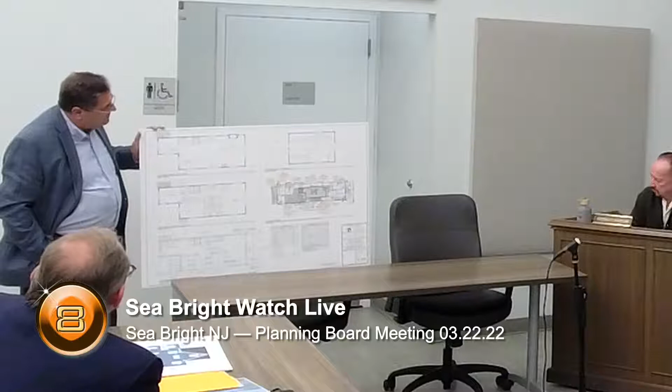We are proposing an elevator so that guests and groceries can get up to the kitchen a little bit easier. There is an attic as well that leads out to a balcony in the front, taking advantage of the ocean view along Ocean Avenue, and a half balcony off the rear, which could look at the river and mountain view. So we're trying to take advantage of all the views with this concept.

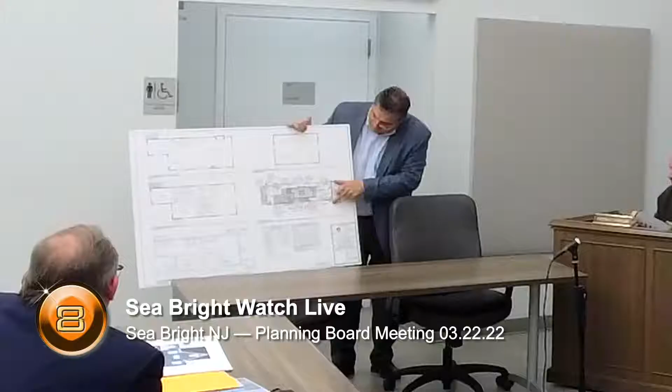Any questions? So I just showed the board the survey, sort of a site plan, giving the board orientation—I'm sure they're familiar with it, but we've got that 40-foot width on Ocean. So the property's only 40 feet wide, but it is 140 feet deep. So where it doesn't meet the requirements for the width of the property in this zone, it's bigger than what's required square footage wise.

So this is 5,600 square feet, and I believe only 4,000 is required for this zone. So we meet the square footage, we just don't meet the width. It's supposed to be a 50-foot width according to the zone, but this is pre-existing, and if we keep the setbacks on a 40-foot wide lot, we're basically left with a trailer. I mean, you basically have 10 feet left to build a home.

So we hold the 25 feet off of Ocean Avenue, which is required. 25-foot 9 off of Ocean Avenue. Originally it was 40 feet, so we're bringing it a little bit forward. And we're maintaining 8 feet on Mountain View Way and 7 feet on the rear side of the property.

So the 8 feet proposed along Mountain View Way complies with the side setback in the zone, but technically requires a variance, right? Because we technically have 2 front yards since it's a corner lot. That's correct, which would require a 25-foot setback off of Mountain View as well, which would leave us with really a sliver, like a little train car kind of thing.

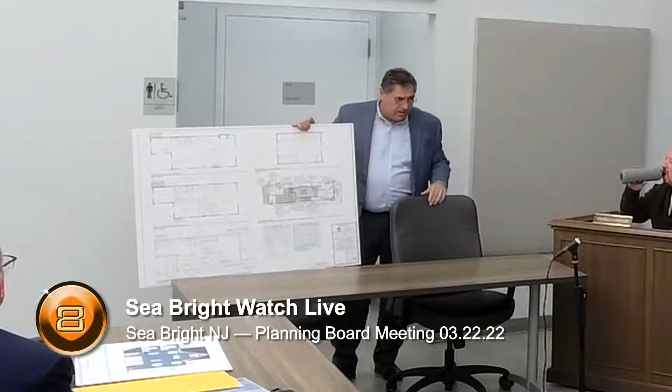Okay, so we've got the lot width, we've got the setback issue, and then the last variance we need pertains to... oh wait, before we go to that, on your top level there, what did you have? This up here? Yeah, so this is the attic space above the living area, continuing up, and basically it's a semi-finished attic that leads to a front balcony and a rear balcony to capture these views. So that qualifies as a half-story then? Yes, it meets the 1/3 rule of the floor level.

And then, okay Sal, let's go to the elevation.

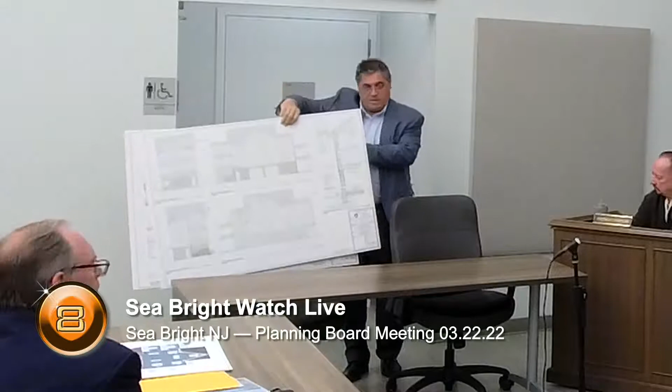Could I ask you one question? I don't know, it's probably more of a legal question. When we were reviewing the application for the project in Mountain View back there, I know the engineer came up with the fact that on Mountain View there's a right-of-way widening line, which we had designated sidewalks behind, and obviously it can't follow through to the front. But is there something, do they have to get a variance for that, or do they have to build a sidewalk? Wasn't it, on that street, since it's a narrow street, I think it had a widening line to it. I don't remember that. I don't think we did talk about it, I don't know to what extent, but it's not shown on the survey.

Well, the survey utilizes 2004, so he's just doing an overlay from the 2004 survey. That's correct. Right, so that's what I'm saying, but I have no objection to what you're proposing here, but I didn't know if that has to be on the record, that we're going to give them relief not to. You mean to not require the construction of sidewalk? Right, up to the widening line. Yeah, I don't know if it's variance relief, but certainly we would request a waiver from any requirement for the construction of sidewalk. But I don't know if it's a requirement here.

Do you remember, I know there was a discussion that the town talked about widening the street at one time, but Dave had us run the sidewalks up to the back of their property on that new development. The sidewalks are going to be on the property of the new Mountain View Villas, within the widening line, but they couldn't extend it up to her property, up to Ocean Avenue, because they weren't allowed to do it on this property, on both sides of the street. So there was no point widening the road or adding sidewalks, because it wouldn't continue to Ocean Avenue.

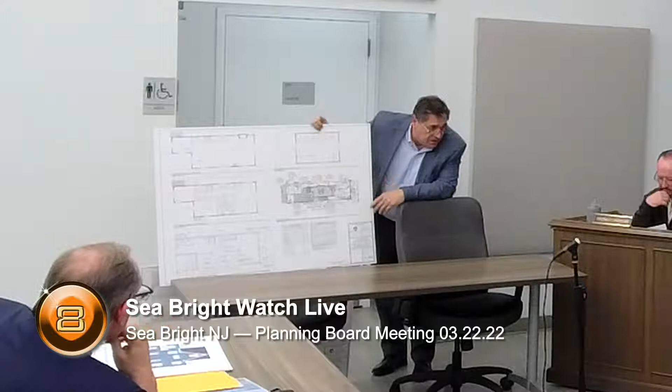So Sal, if there is a requirement, if Dave Hoder comes up with a sidewalk requirement, there's a little additional right of way beyond our property line. There's a note on the original survey that calls out edge of pavement, and if I were to scale that, it's approximately 2.5 to 3 feet to our property line. So if we maintain 8 feet to the property line, there's still another 2.5 to 3 feet, so it's really 11 feet. That might work with a 3-foot walk.

There's part of the right of way that is not paved. There's about 2.5 feet within Mountain View Way, within that right of way, outside of our property line. There's a curb, but it's all grass to the curb, and the curb exists 2.5 feet beyond our property.

So the sidewalk would be partially in that area and partially on our property. But there are still two poles right in the middle of this, so it might not make sense to put a sidewalk in there—just let Dave take a look at it. A 3-foot sidewalk would probably be sufficient. Let's see what Dave says, and you can work out another compromise if it's only 3 feet.

No, what we would do is we wouldn't vote yes tonight. We would direct Monica to draft a positive resolution. You would have your conversations with Dave Hoder, and then we come back to the next meeting and incorporate it. If you're okay with it, fine; if you want to argue against it, you can come to the meeting and argue, and then we would approve the application at the next meeting. As a board, we might have to give relief on it if he's saying yes he wants it. That way you don't lose any time.

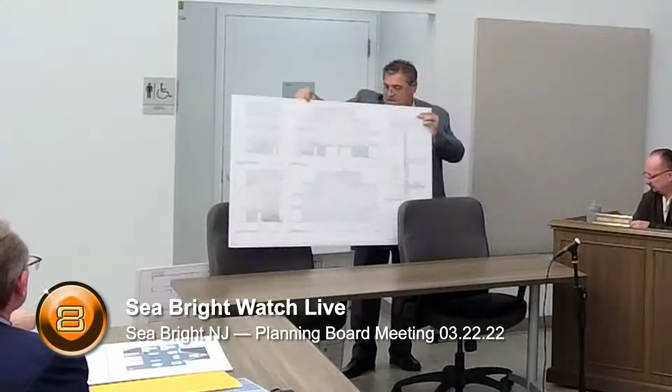Assuming we approve the application, assuming it's approved, let's go through the elevations real quick. So basically we walk through the floor plans, and this is sheet A101, the drawing for exterior elevations. Top right corner is what it would look like—the front elevation over Ocean Avenue.

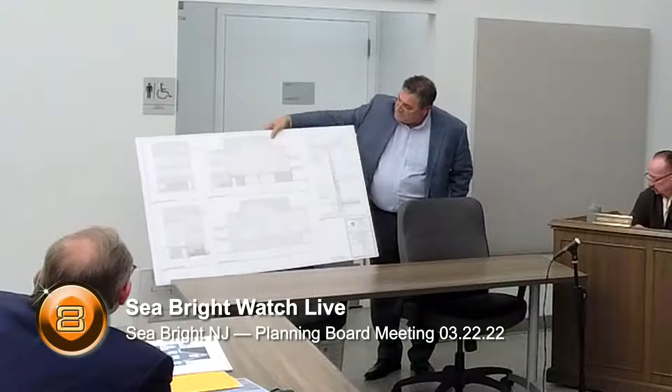This is the side elevation we're talking about, with the garage doors and the 8-foot setback to the driveway and sidewalk. This is the predominant elevation of the house on Mountain View, even though the front faces Ocean. The opposite side has the typical setback, with basic minimal window placement. The rear, facing Mountain View and the river, has an attic deck and two small decks off the living area and bedroom area.

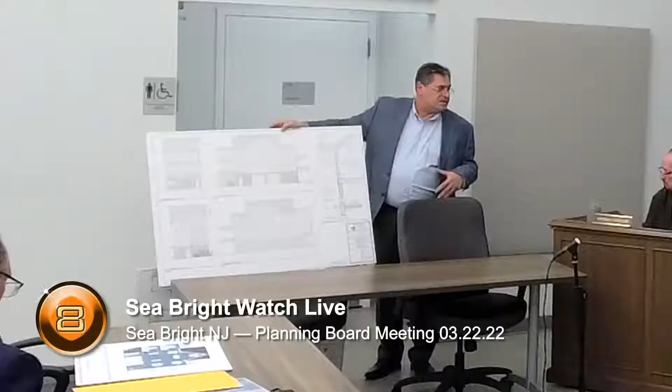We also have an additional carport underneath one of the decks, so you have room for 3 cars. Looking at the site plan, we actually have a detached garage on this property along with a significant amount of travel space, so you can park 3 cars. That detached garage is existing—it's actually been reconstructed, and yes, it's going to stay; it's on the site plan.

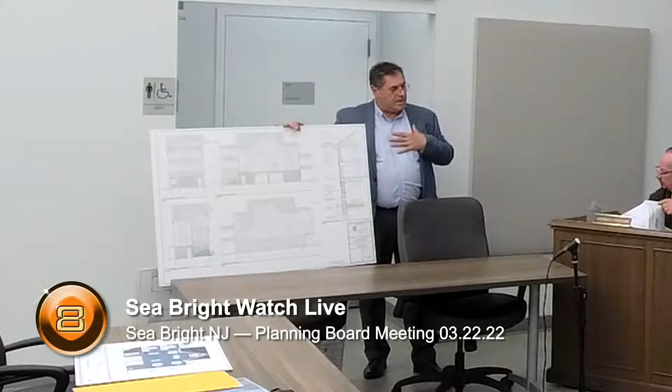It's a single car garage, really—maybe you can get a small compact car in it. I use it for storage, pretty much, but that would be considered an accessory. The carport is part of that garage, it's just a roof overhang. The carport I'm suggesting is going to be under the new house, under the rear deck.

So you're showing 2 on the original two-car survey and parking. There was a carport over the garage, but that part of the roof collapsed during Sandy and I didn't rebuild it, so there's no carport on the garage, just an overhang. So theoretically you could have 4 cars parked on the property. Yeah, and you have two off-street, plus the lot across the street too.

But if that's going to remain as an accessory building, it doesn't meet the setbacks for it. But it's existing, and we didn't do anything other than cite it. You just want to note it for the resolution, is what you're saying. Yeah, I don't think he's objecting to it, we just want the existing non-compliance noted in the resolution. Okay, that's about it.

It's going to be a gray siding with white trim. This would need... please excuse, Mark, the blue siding, but we don't have that as part of our package.

We're going to mark that as Exhibit A. Can you just give me a description as to what the south side elevation colors are? A colored rendering of the south side elevation, titled SK1. Thank you, I did bring copies to hand out if you'd all like.